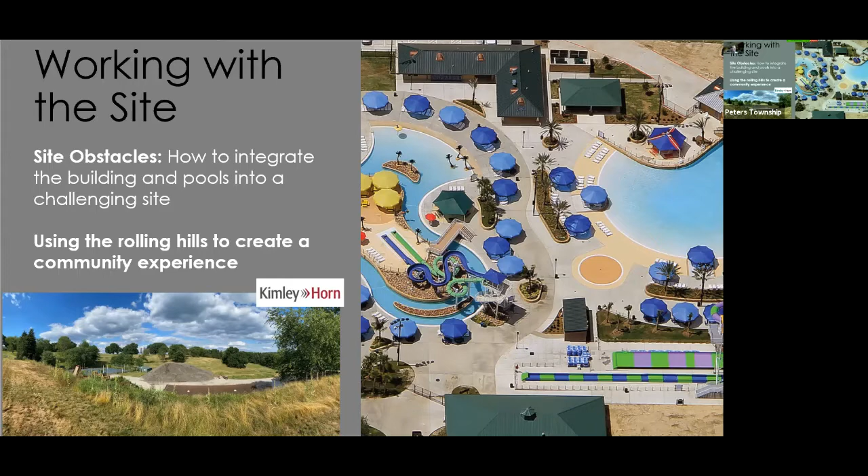In particular, looking at earthwork for this is probably what most people are most familiar with when they see a construction site, right? It's earth moving and machinery, and there's a lot of cost that goes into that.

I think it's super critical as you guys are going through concepts to be doing preliminary grading and earthwork modeling early on in that process, so you make sure that what you're looking at is something you really like, that you can afford, that you're not going to have millions of dollars worth of retaining walls in order to make it attainable.

Also, stormwater management. I noticed there was a large retention pond on one side, and there are several elements of stormwater management just going into your ordinance. Looking at water quality features and volume reduction, that's the kind of thing you're going to want to look at with some of your low impact development standards that you have in your ordinance, and try to spread those things, distribute them around the site, into the landscape and into the facility itself.

So I think those are some concepts we'd like to explore further, and we'll get into that with our site analysis.

So with that, I just want to take a few moments and do the Vanna White piece here, and I'll try to talk loud enough for the mic to pick me up. We took some time to look at what the existing site is. As I mentioned, I've been on it personally a number of times now, and looked at what the master plan showed, and whether there's greater opportunity, or concerns with it, and ways to be better.

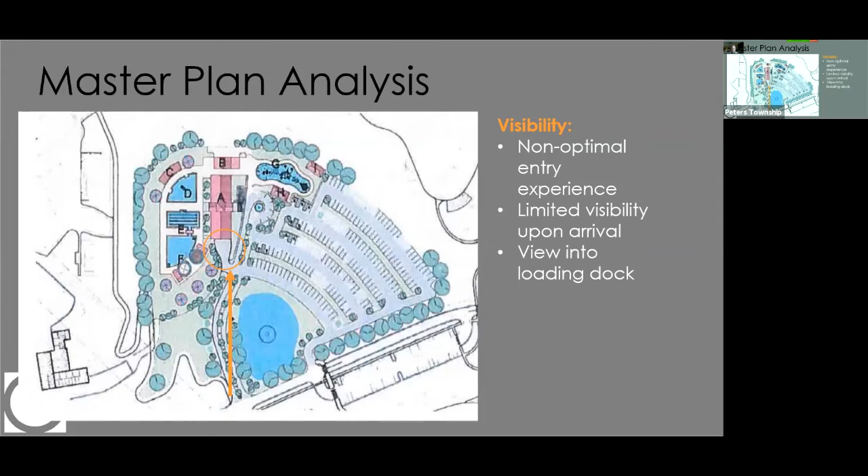The first thing we know, I think the logic, and I wasn't part of the process, was that you have the flat area where the tennis courts are and where some of the parking was, and the overriding logic was to put the pools where the flat area was. So you'll see that's principally what's derived.

I'm going to talk about some concerns with that, but when you look at flow and experience, you look at topography, as Paul mentioned, you look at workability of how people move around, but then you also look at what experience you've created when you're done.

Some things we see that are a little concerning here: with this long drive, you think about going to the pool and dropping somebody off with all the gear, then parking the car. They're going to get out of the right side of that car 99% of the time. So you come up the hill, and by having everything on the left, you immediately create a challenge that's a traffic flow problem.

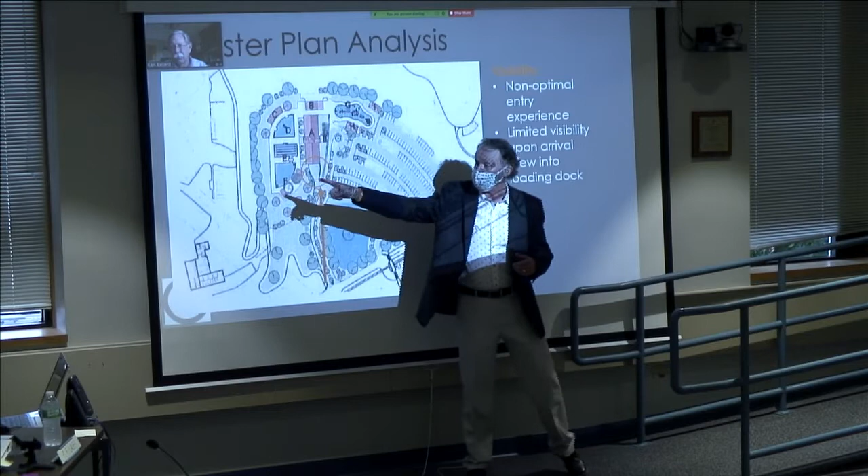We'll talk about that. Because this hill is raised, this area is essentially not visible from anywhere except above the hill. So you pull in, and you see a sea of parking, and you drive uphill, and the principal feature you're able to see is the loading area here.

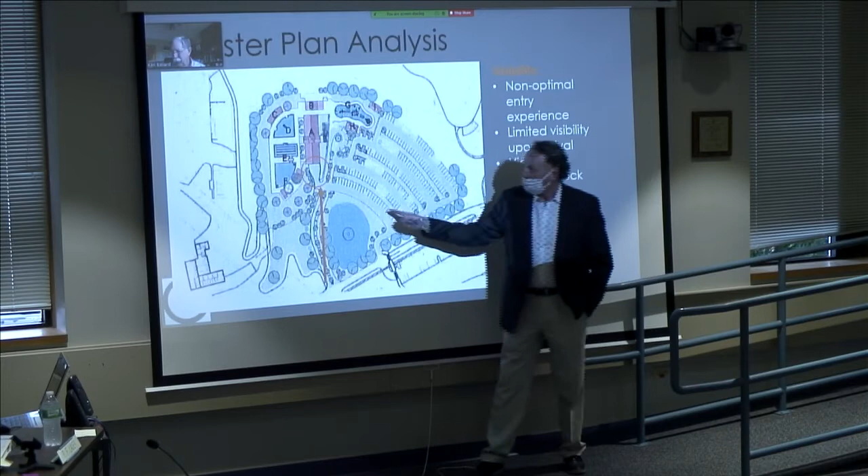Now you have to stay left to go into a turnaround loop. You have to come back down, and then go out into parking, creating a pretty significant overlapping traffic conflict where you have people walking and crossing, and cars that have to go in front of the building a couple of different times. So those are just concerns that we see, and anybody can feel free to hop on.

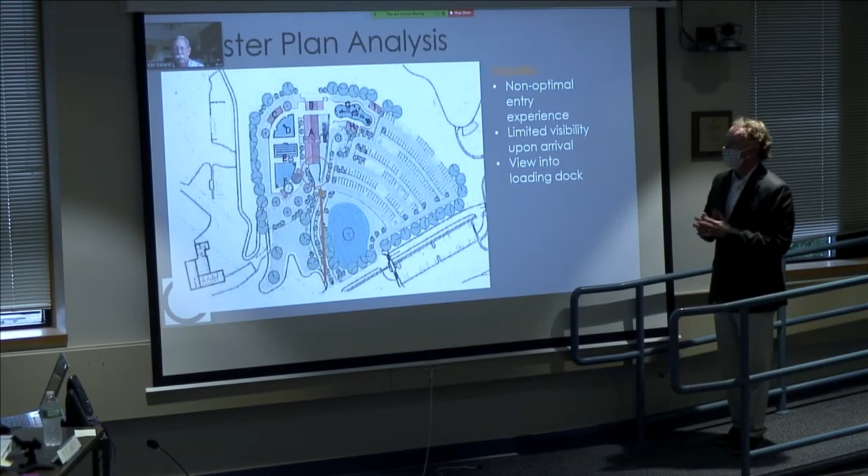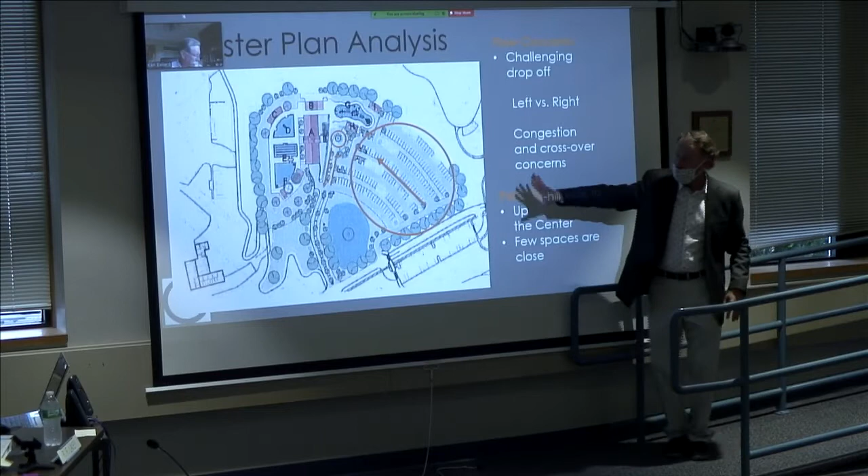So I mentioned this left-right question. Either way, you're going to have to terrace, creating level spots, and do a lot of work to create that parking. And the parking has this fabulous view of the pond, while the pools are essentially a little bit trapped in a pretty small area.

Then people are going to go downhill. Parking's all going to go back down the hill, and now everybody going up is going to have to kind of schlep up to get up to the facility. So those are just some things we look at, along with some of the traffic issues I already mentioned.

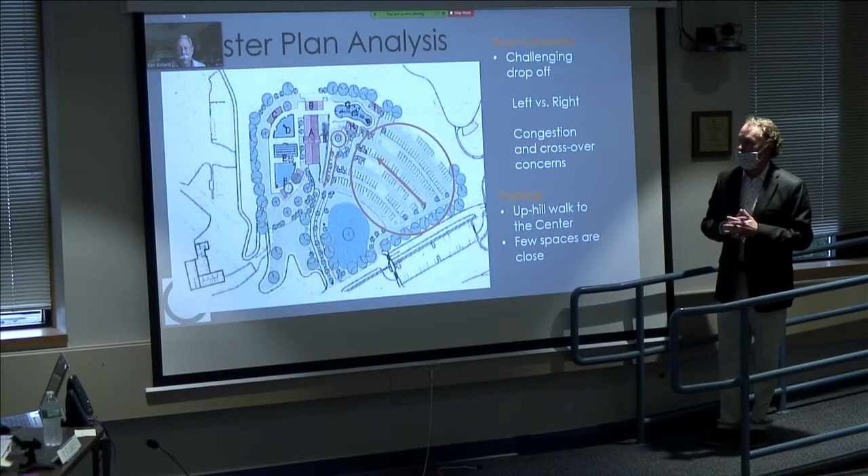The third thing is that if you look at the pool deck in an aquatics facility, by limiting your development area to where it's currently shown, and I'm going to let Carl speak to this, there's not enough area for people outside the water.

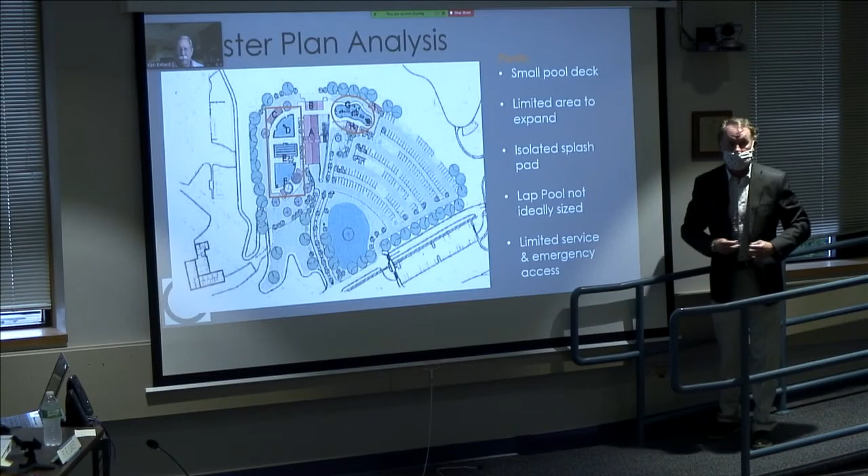With an indoor aquatic center, you're usually looking at about a 1-to-1 deck to pool water surface ratio, and that's honestly just for visually, it's about what we have here. For an outdoor aquatic center, you've got much more of your population sitting in lounge chairs, so you're usually looking at about a 2.5-to-1 ratio.

So you want to look to maybe expand on the deck, and a couple of other physical features, like the splash pad. I know there were some goals potentially to expand the season by a couple months, to get more use out of it, maybe some rentals with a shade pavilion. But having that exterior to the other buildings, it could be integrated potentially a little bit better with the site.

Also, with the lap pool still being a question mark whether or not it's going to be indoors or outdoors right now, having that in the center portion of the site could really hinder some plans for development. So that would be better situated, probably closer to the building and more at one of the extremes of the site outdoors.

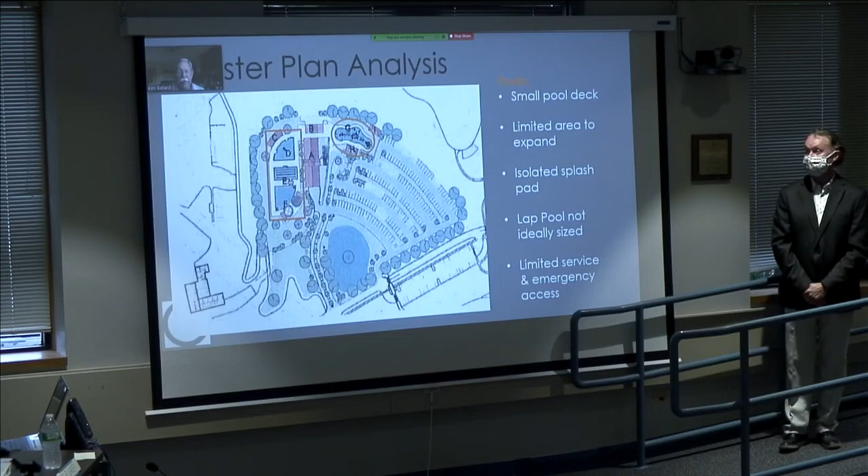I think the main thing, and it's already been touched on, is that we can give you a design that's a little bit more operationally efficient and also builds you capacity with more deck space and more lawn areas that'll help you. It gives certainly a less crowded feel even when you're maybe at capacity. And even the organization, as Carl indicated, of the different bodies of water is probably not ideal for ease of operation, so we'll look at some options that make that more possible.

Again, real concern over if you were going to enclose that 4-lane lap pool, its location within the facility really makes operations that much more difficult during the summer months. So with all of that in mind, we want to develop a concept with you that is for you.

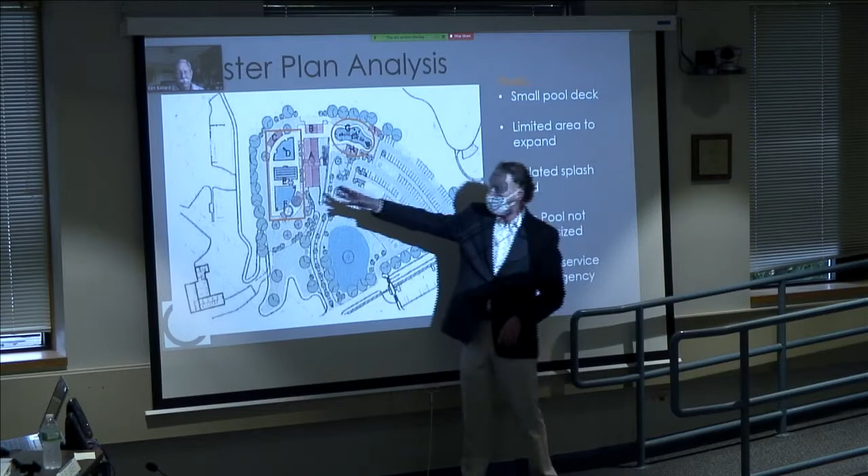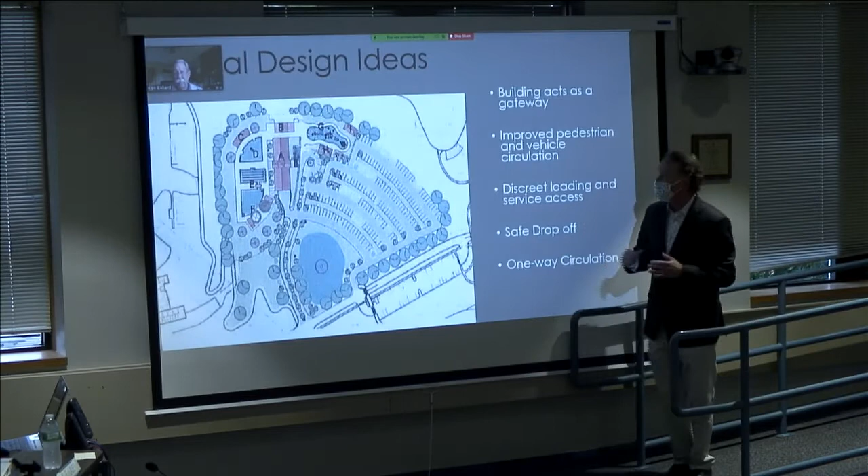We were like, well, okay, is there a concept that could address all these problems? Because not only do we not have enough area really to work with, there's no way to get it in this configuration. You have an enormously steep upgrade hill right here, and another enormously steep upgrade hill there. So it's hemmed in such a way that we thought, what if we looked at it a little bit differently?

You gotta go one more. There we go, there we go.

So what we did is we just said, how can we use that exact same site and solve for every one of those concerns we had? What we really looked at is that if you flip the concept and say, okay, we're going to terrace the area over here to put a really beautiful aquatics facility, and use the flat area you have, plus terrace out of it to get the parking, so it's a zero-sum game.

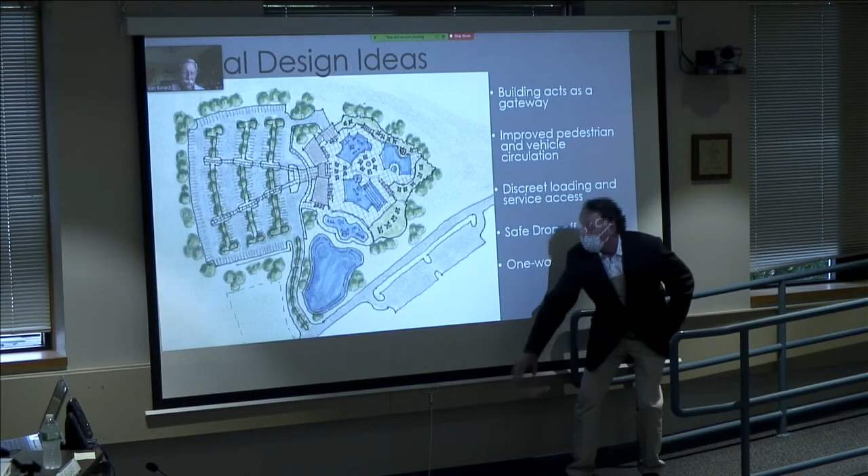I'll just start at the road. You can come in. When you're out here, even on McMurray Road, further down, from your park master plan road, this is visible. That hillside, you'll go by there, and you'll see that this is visible, but that uphill flat area is not visible really anywhere.

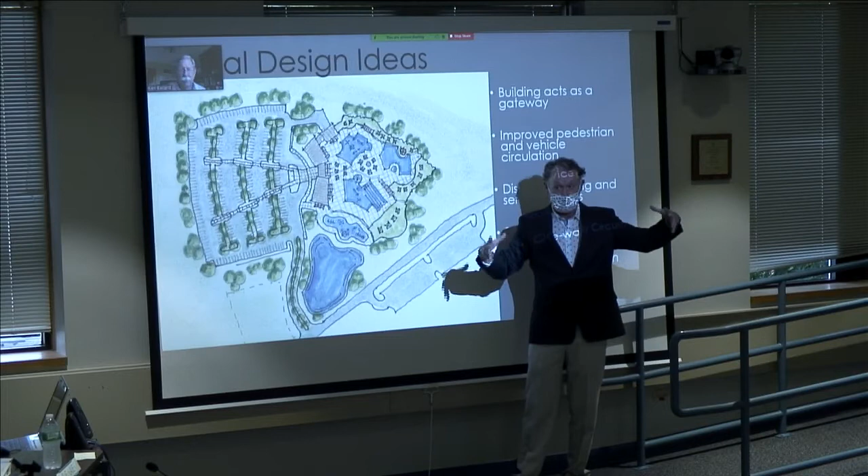But you'll be able to see this beautiful aquatics facility and really have it be an experience. When you would pull in, that's the exact same driveway location that was shown, but with it on the right, you now have a natural drop to the right, just as you would want it without a cul-de-sac.

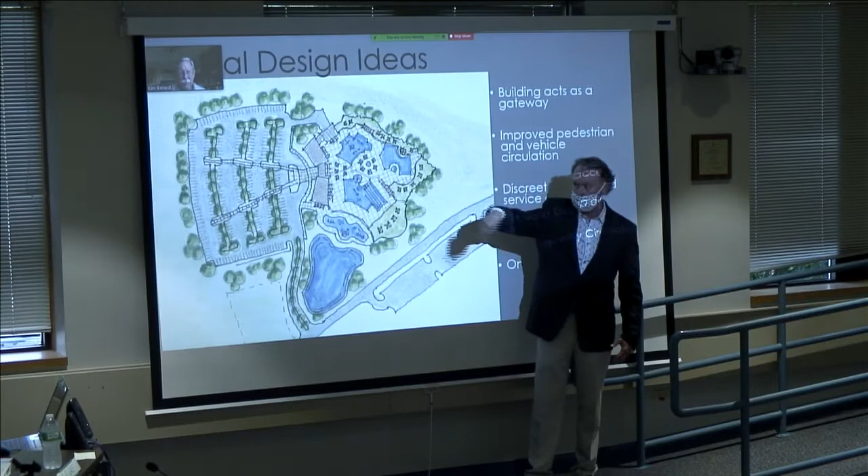You'll be able to continue to move and go out into parking and never cross over that again, so much so that you can do one-way traffic, which would be something to think about in an area where you have lots of little kids and people getting out and not paying attention, maybe people being in a hurry or younger drivers cutting through. So you could do that.

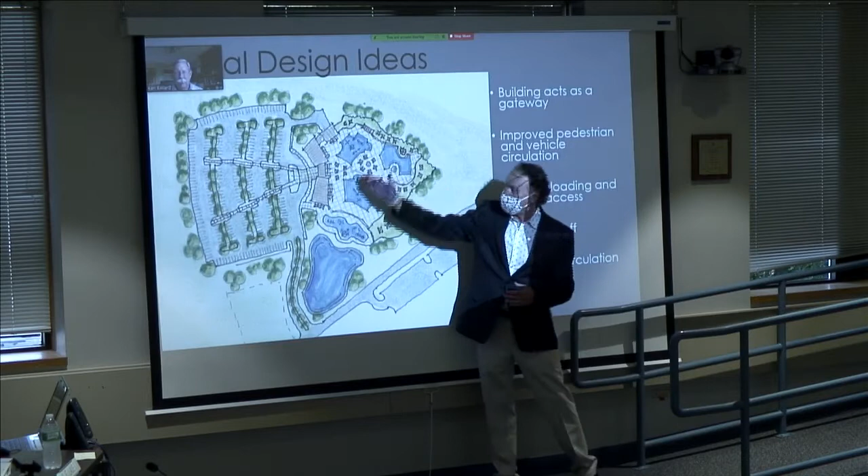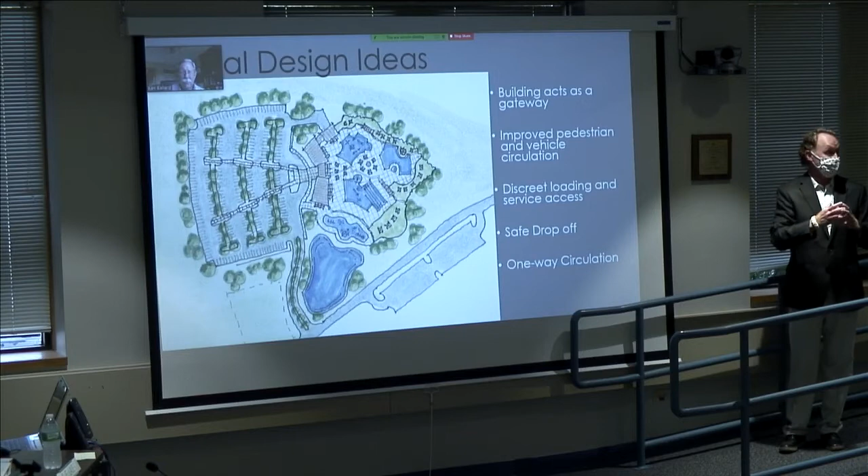Use the building as a gateway to the facility, and then you could start to use the hill to actually step the pool decks down. You look at revenue generating opportunities, or you might want to have somebody take ownership of part of the pool for an event at different hours. You could say this area is those people's, and continue to stay operational. The facility would then maybe overlook the pond and have a better experience looking out than kind of hidden in.

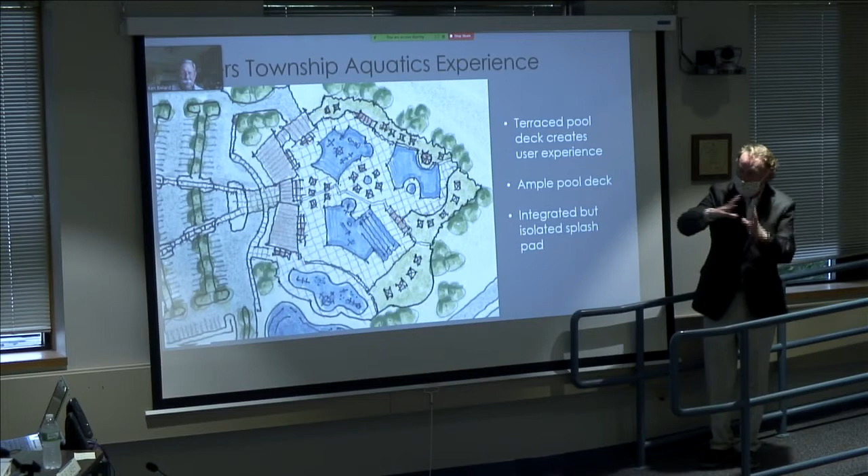You could upsize or downsize it. In a first phase, depending on what the final plan is, it wouldn't have to be as big as this shows, but it's something you could look at. Like I think Upper St. Clair is looking at expanding right now, right, Ken? Yeah, because that area is too small for them. So it gives you the flexibility.

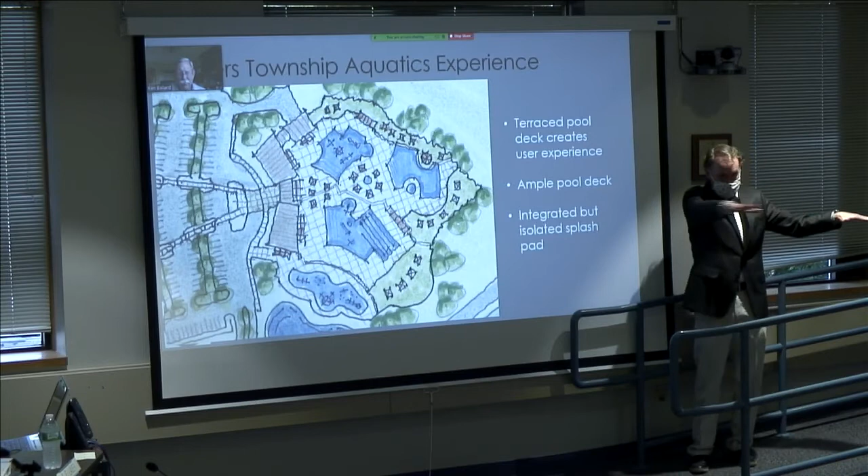It also, if you look at the grades, it would allow all of the parking to be at the same level as the building, so you wouldn't have this uphill, downhill kind of movement.

What am I missing, Matt? I think that's key. One of the better strategies with this, you get that service and loading component pulled up to the north of the site, so it's discrete, it's screened, but there's a lot better access and the elements in this plan are spread out a little better. So you can get your service trucks in there and do what you need to do day-to-day, but it's not right up in everybody's face.

It's well contained. So you'll see we zoomed in here, but this gives you area for grass areas for people to be in, not just on the pool deck, ample pool deck, lots of different experiences and not jammed up. If you operated a splash pad in a location like this during the summer, it could feel fully integrated.

I'm sorry I'm blocking your view. Is that — not a problem. I should have stood there and blocked all of you.

But in the winter, with a gate here, and this would be a step down anyway — or not winter, but after Labor Day and before Memorial Day — that could be open, and you don't have to do anything else to secure the upper pool. But during the key part of the year, it's part of the experience, and people can go from the splash pad up to the pools and have that kind of experience.

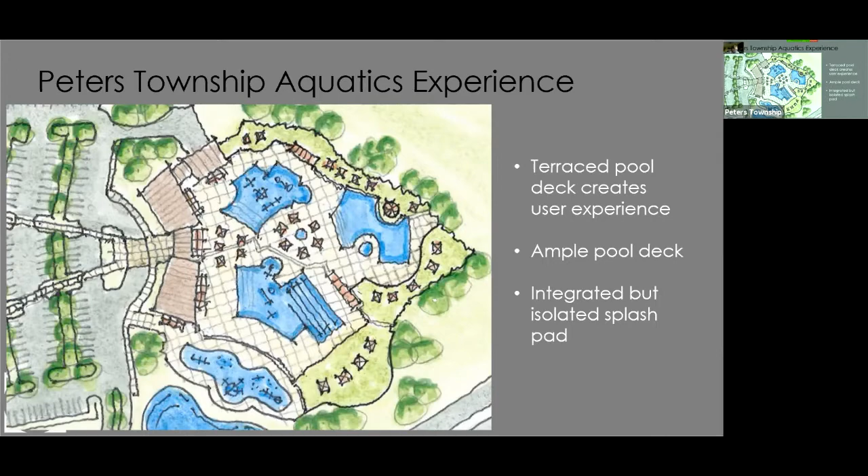So just wanted to share with you a different way of thinking about the whole thing. So we take a moment to turn toward the indoor piece. Okay, so your study talks about an indoor component.

Yep. And the concern that the experts — Ken and Carl will tell you — is if you do a standalone indoor aquatics facility out at the park site, financially it will never have a cost recovery that you'd probably be interested in. And if you guys want to elaborate on that for a moment.

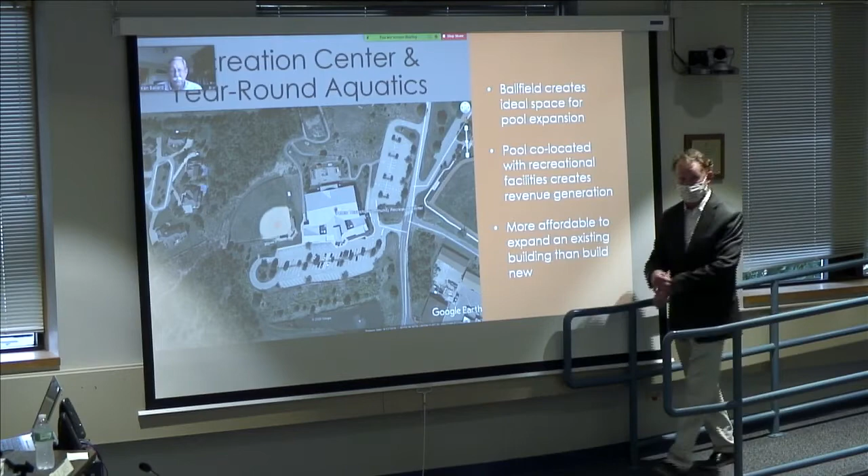Yeah, Ken, I can let you take it, but for a standalone lap pool like this, if you're only talking about 4 lanes, the ability to draw revenue from local swim groups is going to be limited. You can get some lap rentals, potentially some parties, but without any leisure components it's going to be difficult. Then you're looking at therapy and exercise groups, potentially aqua yoga and things like that. But you're probably looking at a model that can recover 40% or so of the operating costs.

Yeah, certainly under 50%. And even though we know they're looking at options of either 4 lanes or 6 lanes, even at 6 lanes it's not going to do significantly any better. As was said, standalone indoor aquatic facilities just flat out don't perform very well financially. There's just not enough draw there.

So that really led us to thinking about other options. I'll let Martin go to that and start to attach it to other amenities where we know the rate of cost recovery will go up.

I had the opportunity to come by and visit and learn that with the new high school, it's going to have an indoor competition pool. So even the need for a lap pool kind of falls off in the community to a large part. So probably what you really want is a more community-driven indoor amenity pool that has some of the same features you had outside — zero depth entry, you can have classes in it, some deeper water, warmer water, and so on.

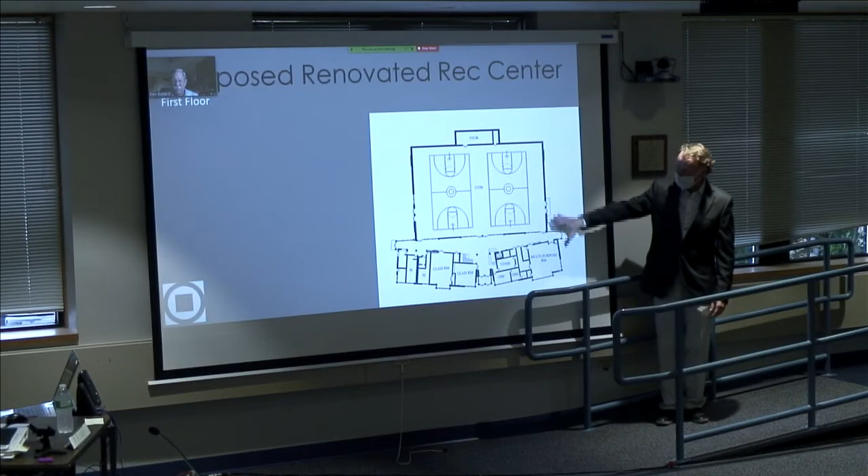So how that could possibly look, if you did that - you're all familiar I'm sure with your rec facility, it's a pretty simple diagram. You come in, main circulation, gymnasiums here. You could sort of plug and play an aquatics facility onto the left side of that. It's as perfect as you could make it, if you wanted to consider it.

I walked up the hill and looked down. All of your infrastructure, utilities, and air conditioning and stuff is behind the building, out of the way. So you're really free and clear.

Paul shared with me that - I don't know if any of you were involved in the original design - but that ball field was put there to consider expanding for a pool. Well, there you go. I didn't realize that, but I knew it was for expansion.

So it can be very simple to come in. You might have a second entry, or you might just stick with one entry - that's more of an operational and security issue. You can go in dry side, go through the locker rooms, right out onto a pool deck.

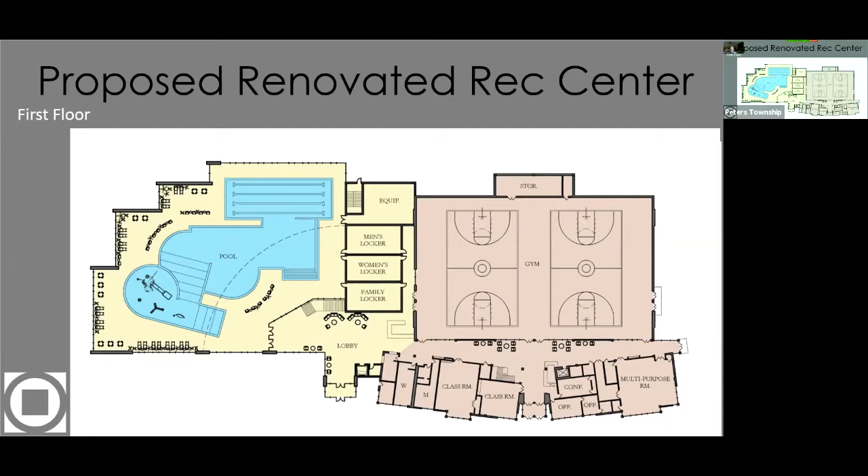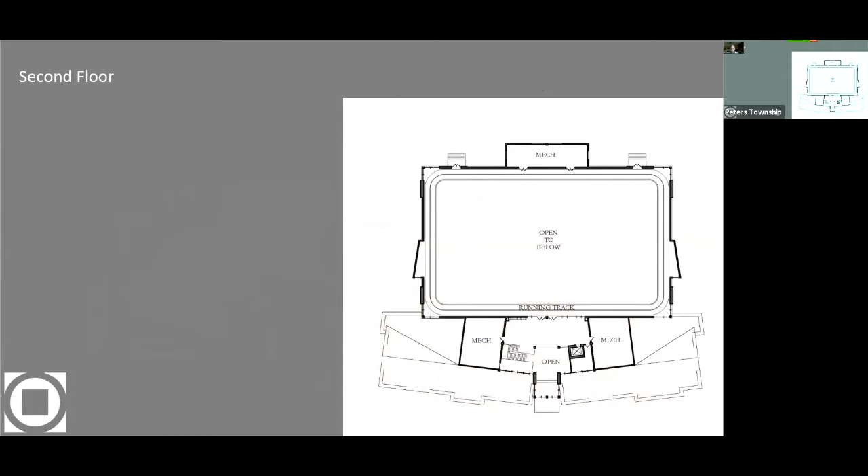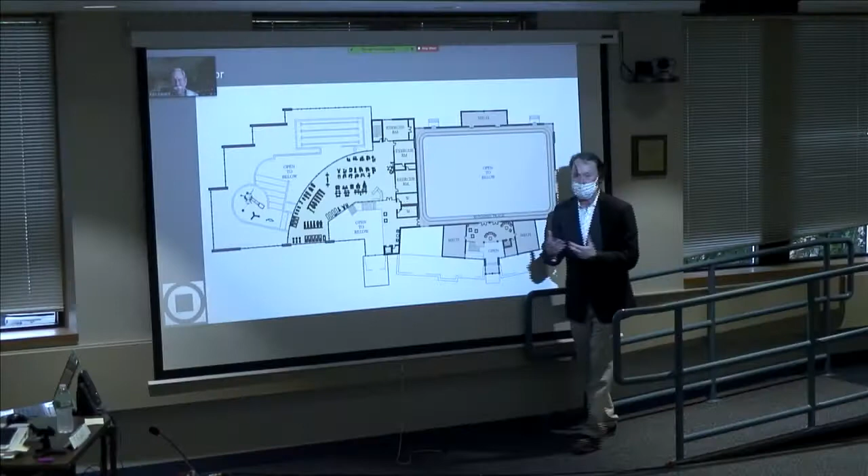One of the things that you'd probably want to consider adding, from a cost recovery standpoint, that you don't have - and Ken will speak to this - is fitness facilities, because that drives membership. It doesn't compete with your tax-paying gyms, and we've talked about that in probably 35 communities. You could have a fitness center that overlooks the pool, which would generate revenue to help support the facility. So I'll let others communicate on that.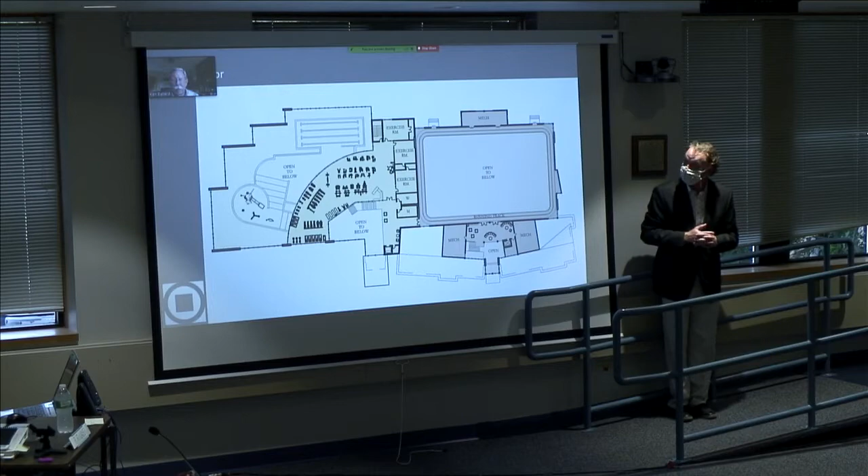Ken, you want to talk about how fitness is a key piece? That's the greatest producer of revenue per square foot of any amenity in an indoor facility. So we know that drives utilization of facilities and overall revenue.

And again, even in Upper St. Clair, when we did that, the private sector has thrived even after that facility came in. We found not only in your area, but across the country, public facilities become, in a sense, the entry point for people into fitness. The private sector often comes in behind public facilities, and when people look to go more specialized, then they take that on. So we simply have not seen any real competition issues with the public sector getting into this.

And whether it's in Western Pennsylvania or the West Coast, that's remained true, especially over the last 5 to 10 years. So it is an amenity - probably the most utilized amenity, even more so than aquatics in terms of people coming to a facility. It would be an interesting piece, obviously a little different than what you've been talking about up to this point, but probably deserves at least a little consideration.

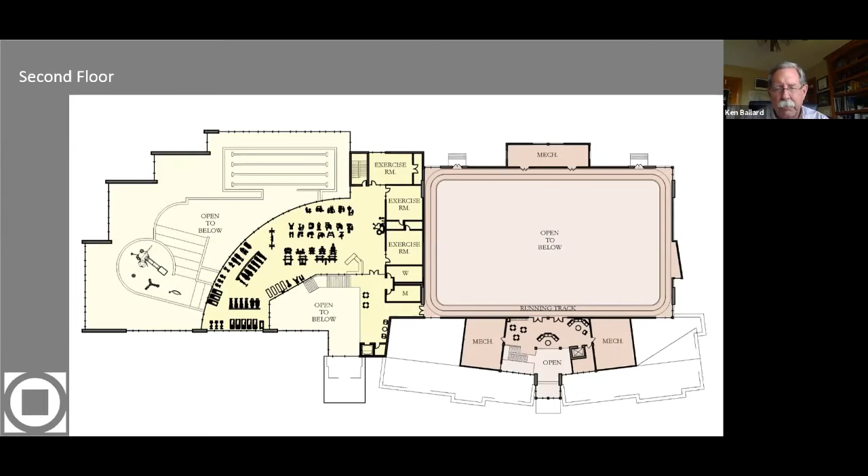So with all that in mind, Matt, we'll go back to the site plan, because that was really the key piece we're here to talk about, even though this is all important. We would love to have any questions, comments, or thoughts that you can share with us.

Well, I have a question. Given the current situation with the pandemic, I realize that nobody has a crystal ball. How do you think that's going to affect your projections? You're talking about assessing the operating expenses, looking at potentially doing a break even. What is your comfort level on your projections? Ken, I'll let you lead that one.

Well, it's certainly a big issue, and I think the feeling within the industry is that certainly with the current situation, that won't be a permanent situation, so we'll be able to get more capacity, whether it's related to aquatics or any other use of facilities or programs coming back. How quickly that comes back is another issue.

I do think there will be some changes in how we operate facilities. We're starting to take those into consideration in our planning efforts for new facilities or for renovations as part of that. And there will also be, I think, some expectations from the public about concerns of overcrowding, so it's going to push down some of our numbers somewhat.

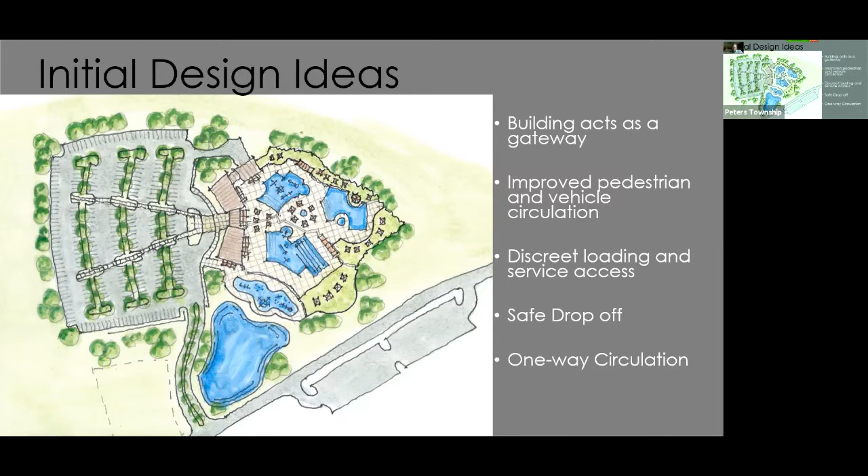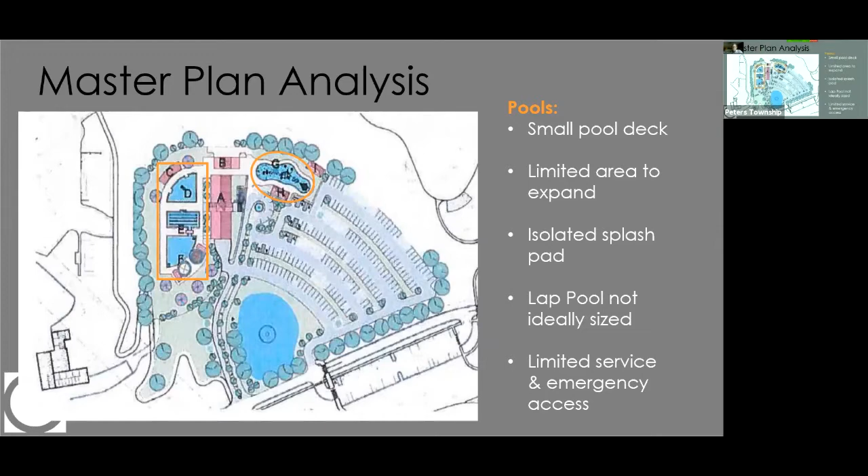Oh, if you go back to the master plan, there was a wet pond shown on the master plan. That's stormwater. You see that blue? Same thing. We just duplicated the pond that was shown, assuming that was part of the stormwater. I thought you were going to put a pond in, and I wanted to know why we're wasting all that space. Oh, good. No, that was just duplicating, making a slightly more organic shape than what they showed. Same idea, though.

Thank you. Back to your proposal, for your cost proposal. Given the situation, if in fact we made a determination that we weren't ready to proceed, do you have a window of time at which this proposal will be good for, if in fact it's delayed, or we would make a decision to not proceed immediately?

No, I think I speak for all of us saying that, if it was 3 years, maybe we'd say that everybody's getting paid more hopefully by then, but if it's certainly at least a year, wouldn't be a problem at all. And most likely if it was 15 months out and you said we want to go, we want to honor that. We really hope to become, with all of our clients, particularly municipalities in Pennsylvania, really a trusted partner, almost like your solicitor. We're here to help you make great decisions, and that's our first and foremost thing, is give you great information to make great decisions, and then help you execute in a great way whatever that decision is.

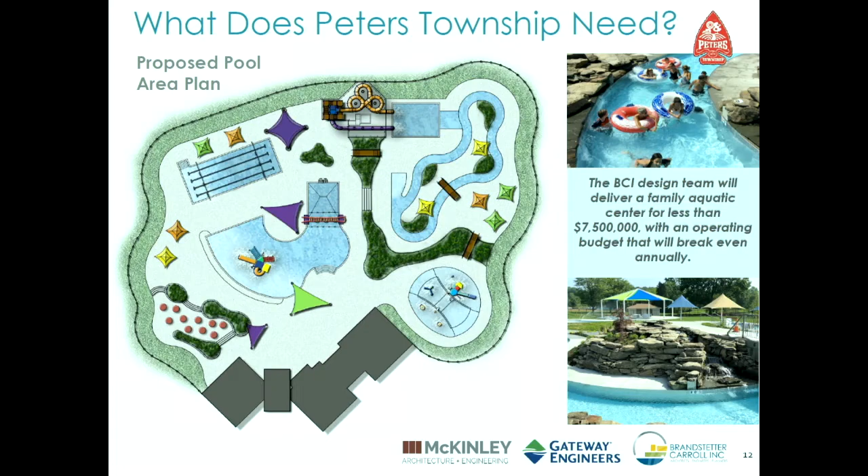There's a lot of things you can do with these lazy rivers. These things can be real fun. You can activate them with all kinds of features if you want, or you can leave them just as a nice passive activity. As Nancy was mentioning, they're great for exercise, and the other good thing about having this many bodies of water is you have lots of different opportunities for swim lessons and all the kinds of activities that go on in the mornings before you open the facility.

And this is just a larger view of it, showing one possible layout for the terrace parking coming down, stormwater control at the bottom of the hill there, and drop off in front of the building.

Also, these are a few representations of bathhouses we've done in different areas. We try to bring in the architecture and make it fit the community as we go. If you notice, these examples all are significantly different because they represent the contextual nature of that community. So everything we design fits the community, not what we have in our head.

The other thing I'll point out on this layout is that basically from the lap pool down to the pool house is where your basic level space is now, so those tennis courts are right up here.

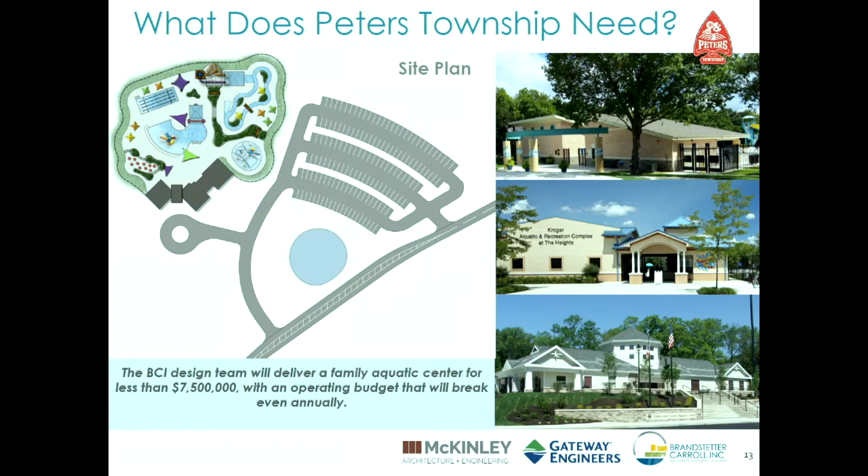To get you in context with what you had planned, the previous plan was similar to this. The parking mirrors almost exactly where the parking is in the plan that was in your master plan, with the tiered grading that would come down here. And then we're anticipating that, again, within the pool fence area, we'll have a couple different levels of grade there.

A couple other things we wanted to share with you. We had some of this in our submission initially, and Paul had some great questions on it, so we've updated this a little bit. We have two charts here.

One is attendance forecast, and one is cost control, which is construction cost. The list is identical from one to the other, the same projects in the same order. We're showing these from all different kinds of years, but it states where it was located, the population of that community, what our forecast attendance was and what the actual attendance was in that particular year.

And what the deviation is, that's for the forecast. Then we also look at their operating costs and revenue to see how they do on their break-even. We have all of these examples — most of them are break-even, some have a large surplus, some a small surplus, some a small deficit. It kind of depends on the year that you track. But we've got about 12 projects that we've looked at in that way.

We have those same projects. We've looked at construction costs, comparing our construction estimate to the actual construction contract and the percent of change orders. Larry, I think the average change order percentage is typically about 4% on a project in the industry. We've got one in here that's 4%, but most of them are under 4%.

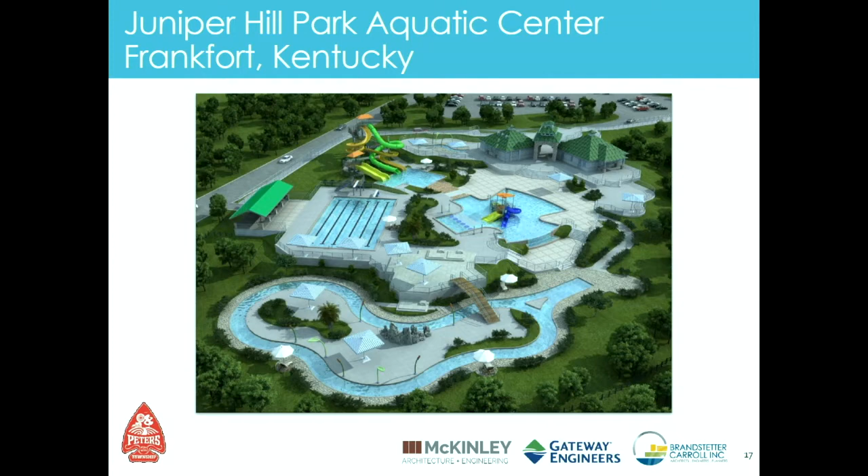The other thing I'll mention is in the layout we did for Peters Township, Peters Hill Park, that slide is intentionally over the grade change. So the tower is actually shorter and the slide kind of goes down the grade change, taking advantage of the grade change with the slide.

Huber Heights had one of the more fascinating projects I've ever seen. We did a 10-acre park as part of this. There was a total expenditure of about $10 to $12 million. That project was about $5 million, just on the list.

They built the entire project with tax increment financing, so there was no increased taxes and no effect on the city's budget. Then they turned it over to the YMCA to operate. The YMCA operates it and makes their profit out of operations. So the city has virtually zero money in a 10-acre, $10 million park.

I like to think when you look at projects and the impact of the project on the budget, you want to minimize the impact and maximize the benefit, and maximize the number of people that come through the gate.

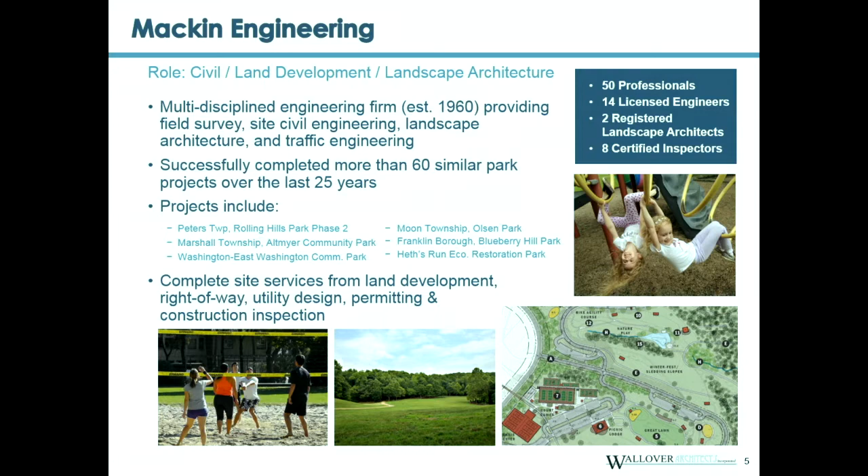Mackin's been here since 1960 in Pittsburgh. We have 50 professionals, 14 licensed engineers, 2 registered landscape architects. We do everything from field survey to site civil, traffic engineering, landscape architecture, etc., all the way through to permitting and inspection services. So it's really beginning to end for site type land development and work. We've done many projects with Wallover Associates. We've worked on Bellwood Antis, Washington, East Washington, Rolling Hills. Our history goes back a little bit. There's also some projects listed up there in other areas that we've done in Moon, Franklin Park, City of Pittsburgh, etc. But we're going to be here for many years to come, and we hope you get the great impression that our work counts. We rely on repeat clients, and we're here to continue to do a great job for you.

I'm going to turn it over to Mark, and he's going to talk about Hayes.

Yes, hello. My name is Mark Dwayne with the Hayes Design Group. We're an architectural firm located in Robinson Township, and I myself am a resident of Peters Township. Our firm's expertise is mostly in municipal and governmental buildings as well as K-12. Those are our predominant clients, but we also do other higher educational and commercial type projects. We're bringing capacity to the table as far as getting documents done, and also we'll be doing a lot of the construction observation. Being local, we'll be able to be on site as often as needed.

What we listed up there as far as pool experience, why it's important is that one of the options may depend on whether a pool is inside the building. We've done numerous school projects that actually had pools in them. It's an integral part of the design to incorporate - once a pool is inside the building, you have to take into consideration the mechanical systems that go into that space and also the finishes, and we're good at coordinating all of that effort.

We pride ourselves in doing affordable, functional space that meets clients' needs, and always keep the budget in mind. That's a very high priority with us, to monitor the budget throughout the project, and we like to do that without sacrificing any quality in design.

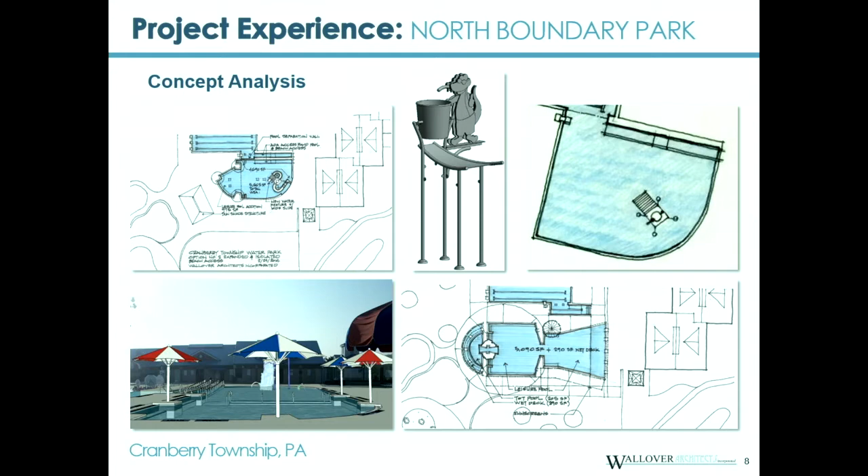Our designs really take on a variety of technique. We look at developing different ideas, we test those ideas with the client, we test them with the recreation departments and the operators. And we generally go through a series of freehand sketches and design ideas that we present during the initial process. Those ideas then are translated into CAD documentation, and then those ideas become reality.

And this is some pictures of the completed project. The tumble bucket feature has just been an absolute smash hit for the kids in that particular location. But all of these images here basically relate to the interconnected nature of both the pools and their water playground features, which are both major components of your desired activities.

This is a project that's south of here. It's down in Graysville, Pennsylvania, south of Washington. This is Ryerson Station State Park. We were the aquatic architects for this project.

You may have seen in the news a few years ago where the dam breast cracked and they had to basically drain the lake down there. This project was a direct result of the lawsuit that ensued, and we were then directed to develop a brand new aquatic facility for the park. And we started with the basic concept design drawings you see in the lower left.

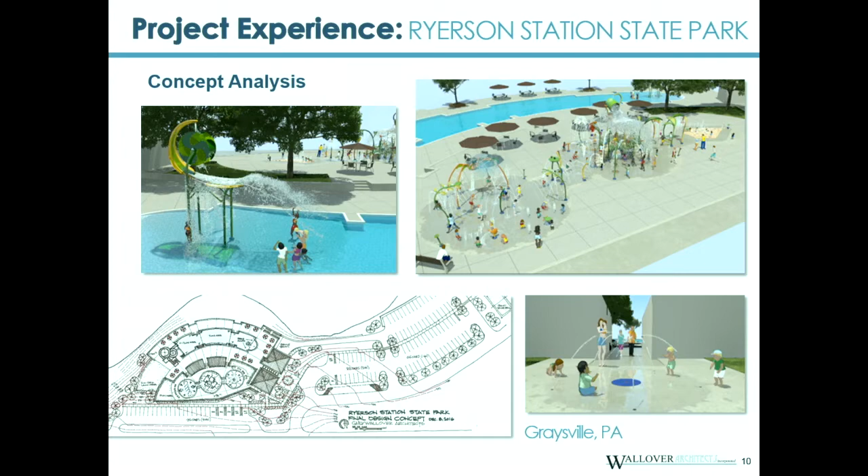They were then generated up into CAD Revit models that were illustrated and rendered, and those were the documents we were able to produce to help the Department of Conservation and Natural Resources in Harrisburg make their decisions as to how they move forward with the project.

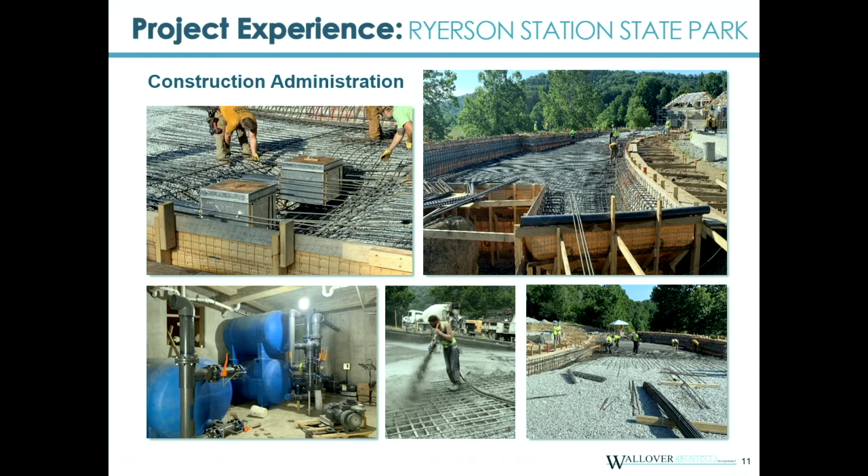The slide on the lower left is the filter plant. It's a high-rate sand filter system utilizing glass media, very similar to the system used at the high school. So when we think about the kind of components and elements for this facility, we want to make sure they are compatible with the work done at the high school. There are commonalities, so there may be an opportunity for the township and the school district to share expenses and staffing for maintaining the water in both facilities.

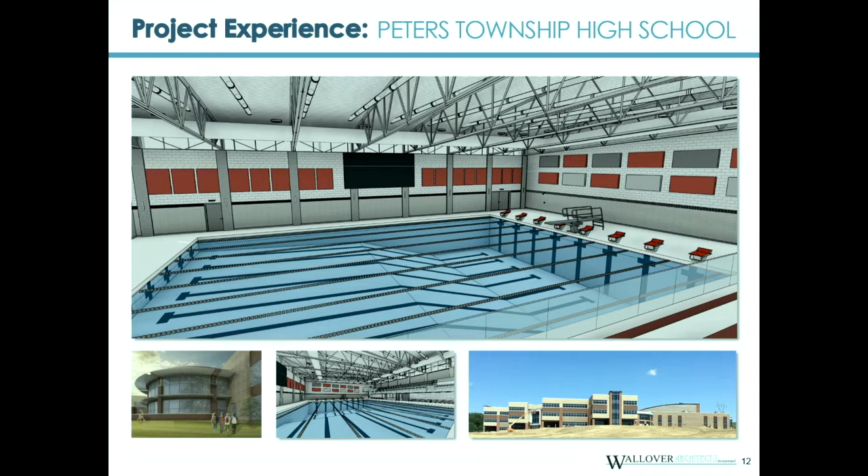This is the Peters Township High School pool, an 8-lane Murtha pool. These are the renderings that Mark's office generated. Mark, you want to jump in? No, there's not much to say here, Ted, other than that's the experience of that project, just an 8-lane competition pool. Most people here are familiar with the project, but those are the renderings the firm did and the progress pictures of the construction on site.

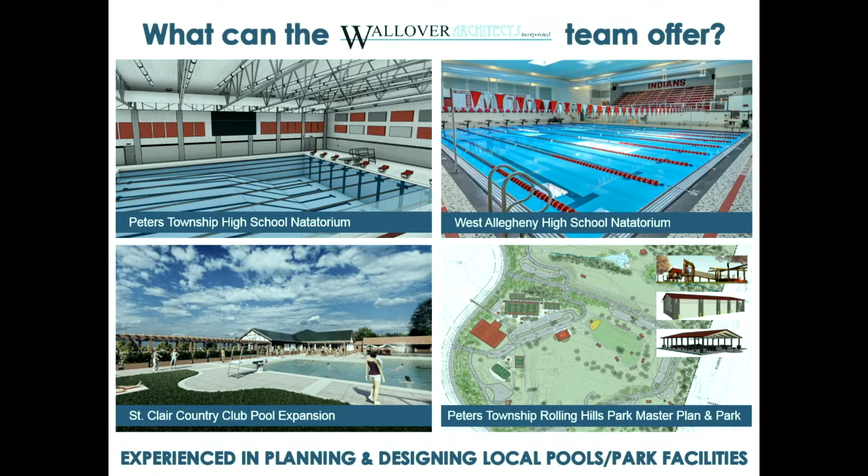We really are a unique firm. We have a strong national and international background. Susan developed a complete renovation program for the operation of the water sports palace in Dnipropetrovsk, Ukraine. It was a facility with far too many employees, operated in more of a Soviet style. She brought United States techniques and the way we manage our pools to their facility. She may be able to talk more about this, but it was a very important project for our firm in terms of international exposure.

We took them from a budget that was deeply in the red to being happily in the black within a few months. They've made some changes, and it's completely different from the way they used to operate, but it's really been to their benefit. The facility is actually their Olympic facility there in Dnipropetrovsk.

The other important thing is that although our practice is based in Lancaster, we work across Pennsylvania, so we have a very strong working knowledge of all the players in the swimming pool industry, both from a manufacturing standpoint and from the actual contractors in the field. With Mark's experience, Bob's experience, and our experience, we have strong local knowledge of the market and who best to bid these projects.

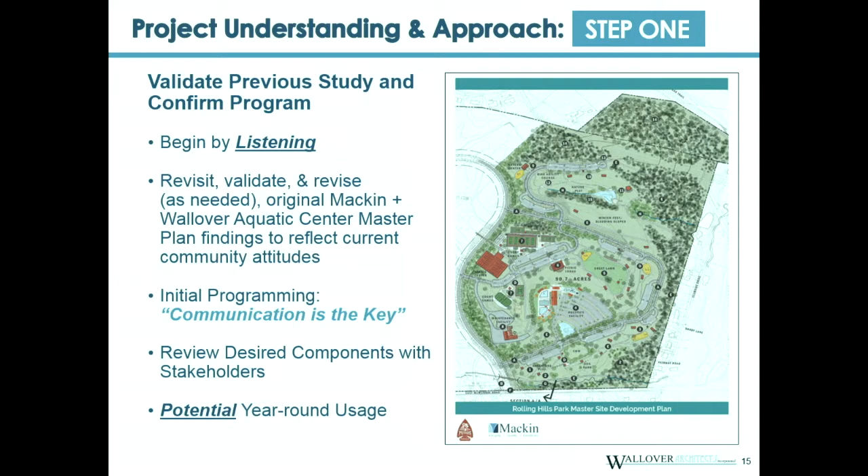I think one of the things we really pride ourselves on is that we are good communicators. I think all of us really enjoy working together with the staff and making sure we bring those ideas into the design process.

One of the things we'll do with you is determine the types of facilities the complex should host. Again, it's going to be based on the information we generated initially with the feasibility study, but also with new data that comes to the table. Bob, Mark, and I, Sue, we really want to make sure we have a full understanding of the components you think would be most beneficial to you.

Susan will be able to tell you which of these kinds of activities can generate the most revenue, and those will be the things we try to determine for you, so you have a full understanding of what those components are, what kind of programming can happen for them, and what kind of staffing requirements might need to be there in order to properly operate them. It's pulling all that information together in one location so that when the township makes that decision, they have data in front of them that's real and relevant.

From that standpoint, we're going to be looking at all the various components that impact the site, ADA compliance, and how that impacts the design of the pools. The fully accessible bathhouse, filter rooms, multi-purpose areas — those are all things that were in that initial study that we will come back to and make sure are still valid and appropriate for the facility you hope to build.

I'm going to talk a little bit about step 2, which is understanding the site. As you know, in the past we've looked at the entire 90 acres originally. This was a southern-facing slope, and that's why the Aquatic Center was situated in this natural bowl area. To get the most length out of something like this, seasonally, the southern-facing slope is the best location versus what we have on the opposite side of the ridge — that'll be the Winterfest area, which keeps the snow most of the year.

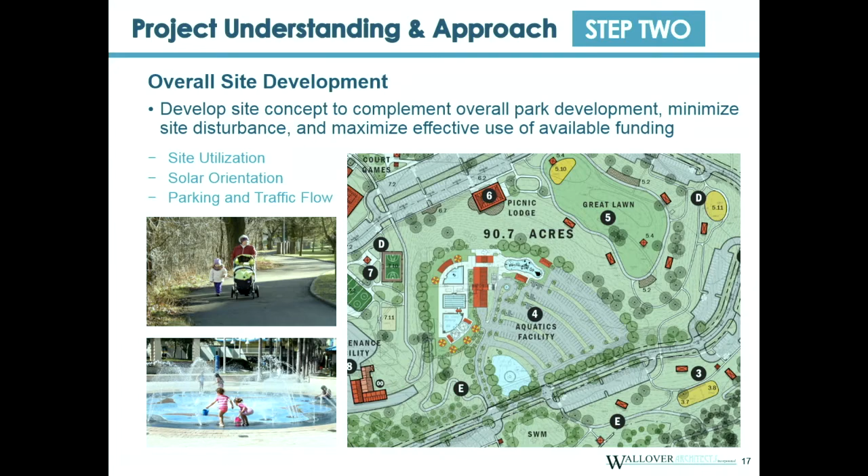Traffic calming, parking, access, dual entrances into this facility, connections for bikeways, trails, and sidewalks—we've already given plenty of detailed thought to this, both as an engineering firm with landscape architects, but also with the architects themselves, and had a lot of interconnected conversation to help figure things out.

So we're excited to continue this, and I'm going to turn it back over to Ted.

Once that process is completed, we'll again work with you to determine what particular features will be involved with the project, and make sure that all the amenities you're looking to achieve will be documented and pulled into the project. Again, with step 3, one of the big things we've hit this year that really none of us anticipated was COVID-19.

When talking to the CDC and looking at some of the things going on, the CDC has really deemed that swimming pools are some of the safest places we can be. Water quality and the type of sanitation and secondary sanitation can go a long way toward controlling virus. COVID-19 is not capable of being sustained in swimming pool water, but it does have the ability to be contained in buildings—so those are all things we look at.

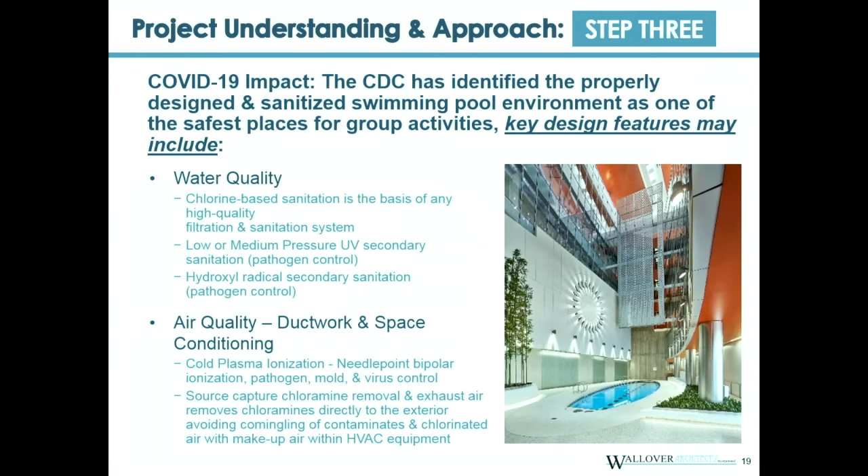In terms of chlorine-based sanitation, low pressure or medium pressure UV and hydroxyl radical are all treatments we use in our pools to make sure water quality is spectacular and clean. That's the most important thing we can do for our kids and users of these facilities—to make sure the water is filtered properly, sanitized properly, and put online.

When we talk about air quality in the building, if we're looking at a year-round structure, we're going to be looking at chloramine capture and the ability to treat the air in the ductwork with cold plasma ionization, to kill and reduce the effectiveness of bacteria, molds, and virus in the ductwork system and in the air column of the building.

Cold plasma ionization has been around for a long time, but there's never really been a reason for people to spend the additional dollars it takes to put it into buildings. Now we have that reason, and from this point forward, all of our projects are going to be utilizing cold plasma ionization for air column treatment.

Source capture of chloramine really only impacts an indoor pool—it's not something we have to worry about outdoors. But if we do go the route of an indoor pool, we'll make sure the air handling systems are designed so those chloramines are removed and taken out of the space, so anybody using the pools won't be subject to high levels of chlorine.

So I'll talk a little bit about the fourth step after the site's development has been worked over, and the aquatic facility has been laid out. One of the last design features, step 4, would be taking a look at the two different design options for the building. Oops, disappeared. You can look at your book. It's coming, it's coming. Okay, that's all right. Well, I'll continue.

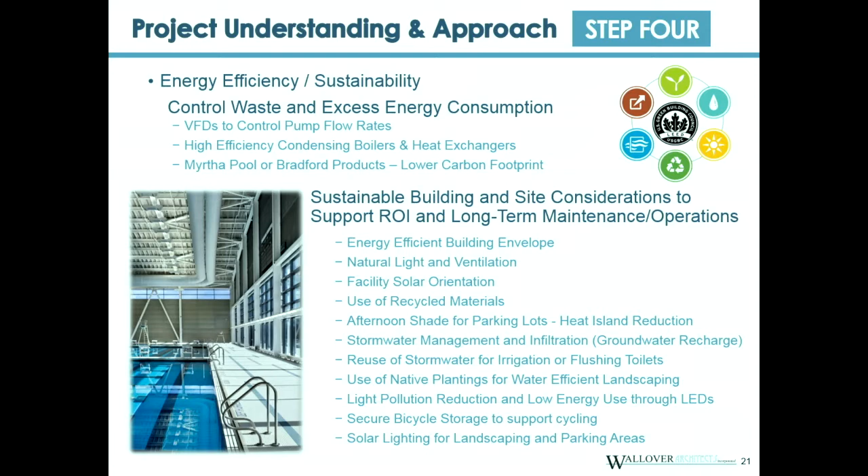LED fixtures are very popular. I don't really need to go there because I think that's almost a standard now in architectural design. That reduces the consumption of electricity. Bicycle storage, we would look at that to encourage more people to maybe ride their bikes to this facility versus driving cars, to help the environment. And then also we would be looking at solar lighting for landscaping as well.

Oh, that's me too. I got to flip the page.

All right, so step 5. Once we have the site, the aquatic facility, the building, and we've talked about the design and gotten through all that, now we've got to put together a construction estimate. Actually, our team prefers to call it a project budget, and we like to present to our clients an all-inclusive project budget. I think it's best that you see all the money that needs to be in.

It's all in, because when you hear people talk construction estimates, really what they're talking about are the hard costs. So in our project budgets we divide it into two categories: hard costs and soft costs. The hard costs are the construction costs with the site development, and there may be design contingencies. That's so the clients have the ability to make adjustments during the design and absorb some of that design contingency. Once we get into construction, there's a construction contingency that will help pay for any change orders. So we appropriately recommend a percentage amount to hold for contingencies. That's hard costs — that's all the what you're getting for your money.

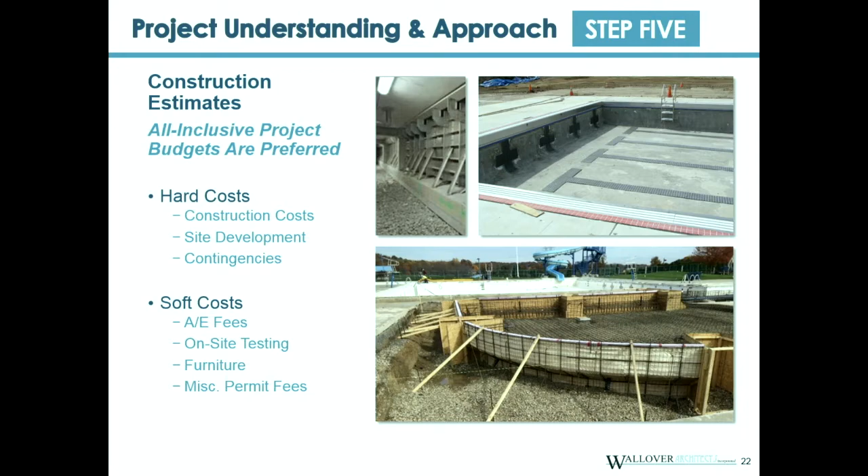Now there are soft costs, right? So you have to realize that there's architectural and engineering fees, there's on-site testing, there's furniture like the pool furniture, there's equipment in the building, and there's miscellaneous permit fees. We try to identify, and we would work with the administrative staff as well if there's any other cost involved, but we really like to bring to the table everything in the project budget so you know all the costs that would need to be spent.

I have step 6, and that's the business plan and understanding everything that goes into it. This comes about after the pools, building, whatever is designed, so that the budget can then be prepared. The first step in any budget I do is talking with the staff about goals and objectives, so that I fully understand, and they fully understand, how we go about getting to the budget and what kind of things are going to take place.

We'll do a comparison in the budget with the summer-only and year-round operational revenues so that you have a good understanding of where those costs will be. Organizational structure will be, needless to say, for the staffing. It'll include, depending on the facilities, seasonal, part-time, and possibly full-time if it's year-round.

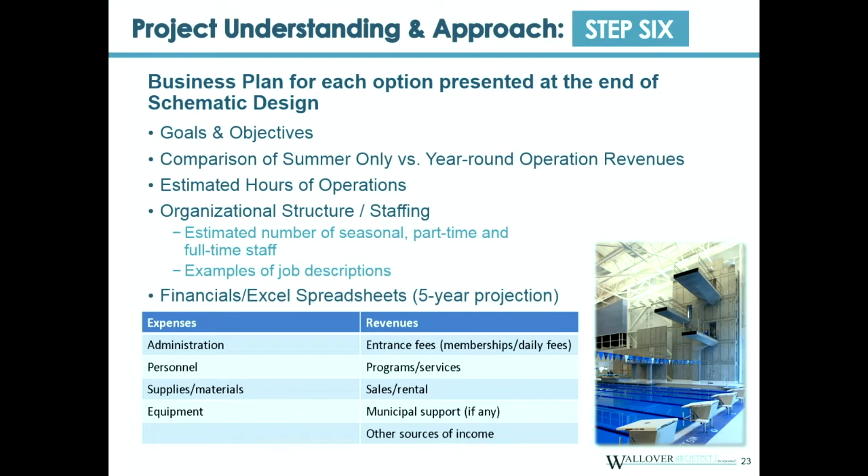The spreadsheets are your normal spreadsheets. I'm not going to go into all the detail on that. It will be the expenses, revenues. But what makes mine a little different is that I really go into detail on what supports that data. I don't just use what similar pools of similar size are doing — I nail it down to your area, what's going on here.

The construction costs that are included at the end come from the architects. There'll also be a discussion about the financial options that may be possibilities for the township to use. I'll give suggestions for special events, not so much how to operate them, but what are some of the things other communities are doing that have been very successful and intriguing for that community.

We'll also do a SWOT analysis so you understand, during the operation, what are the possible opportunities, weaknesses, and threats, and we'll help deal with those ahead of time with some suggestions so nobody's caught off guard. We'll use the studies that have been done and anything else we can use to get our numbers correct for you.

Lastly, I wanted to mention how this all comes together. How do we communicate with council and the community? The process is iterative. We're going to start off meeting with the administrators, kicking off the program and talking about what we should do.

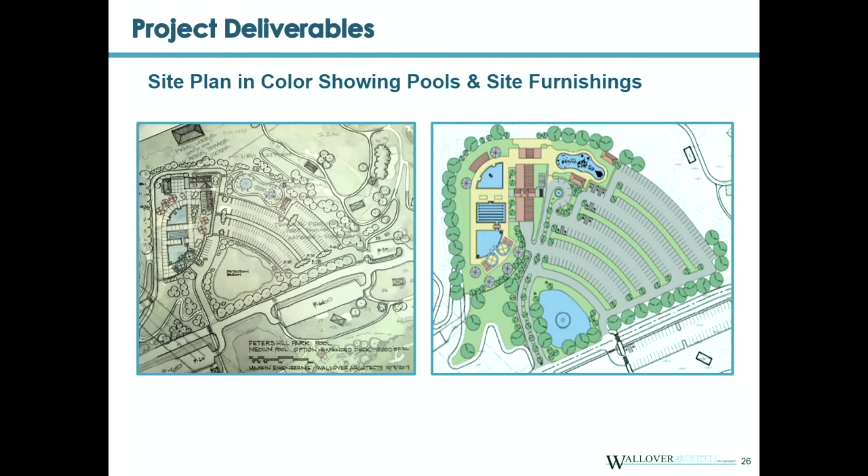It's obviously Peters Hill Park - this was one of the early initial drawings we developed in the early stages of the project. You can see how it developed from a freehand drawing into a CAD document. That's really the process we use: everything goes from the hand to the computer, and then ultimately it's rendered for presentation to the community. We do everything in Revit these days.

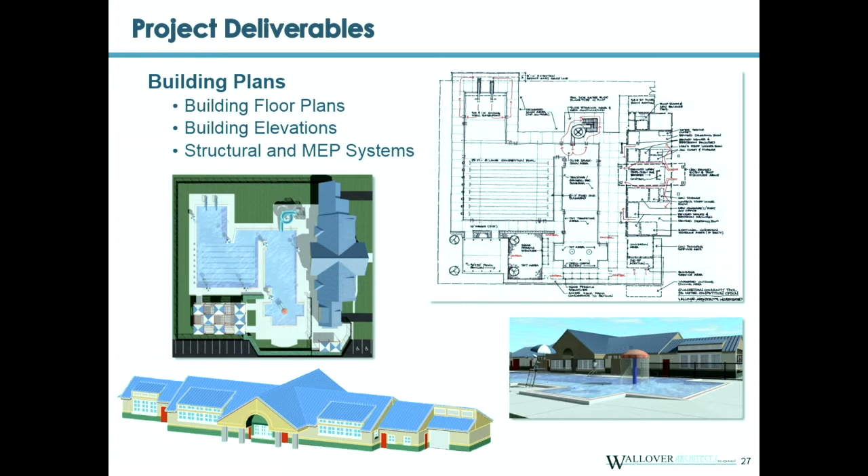We're now working in Revit, which is a three-dimensional AutoCAD software. It basically allows us to build models of everything we're building within the computer. We can take a hand sketch, generate a plan, generate building sections, and create accurate and extremely thorough documentation for the project. The advantage is you can be there virtually with a walkthrough or fly-through, and get to see the spatial arrangements.

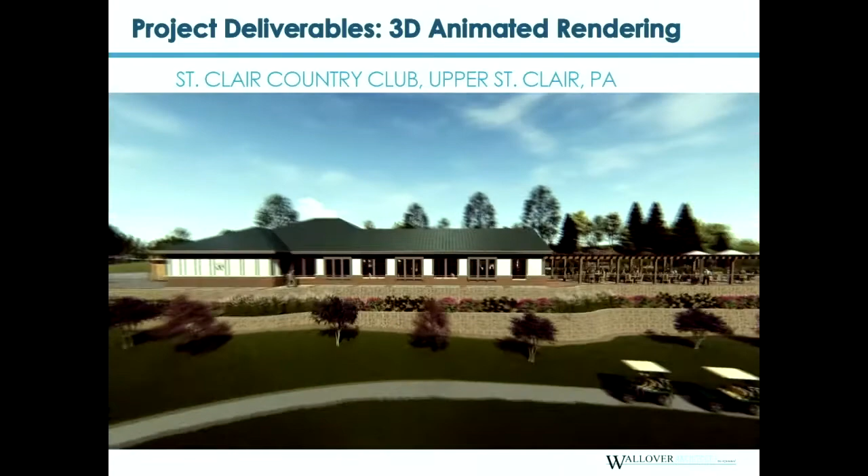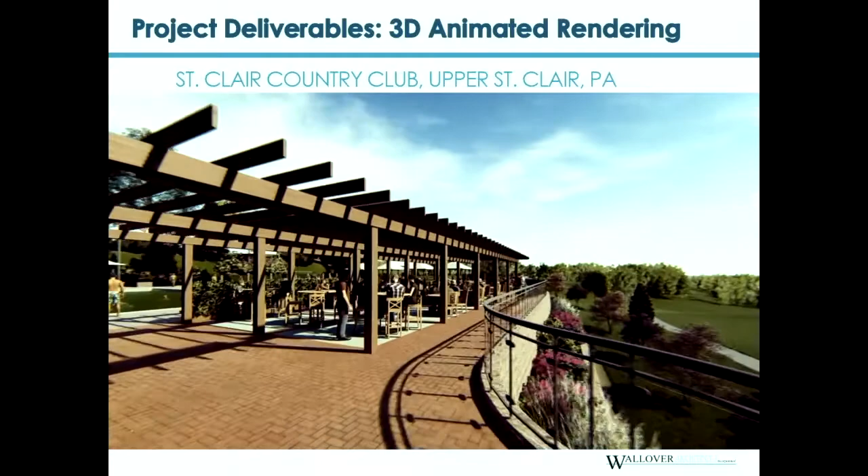Speaking of which, here it is - this was a fly-through we did for St. Clair Country Club. They wanted to do an addition onto their pool house, which is actually an indoor grill and an outdoor grill that the golfers and the members at the pool could use together at the same time. This is something we've included in our process to deliver to you.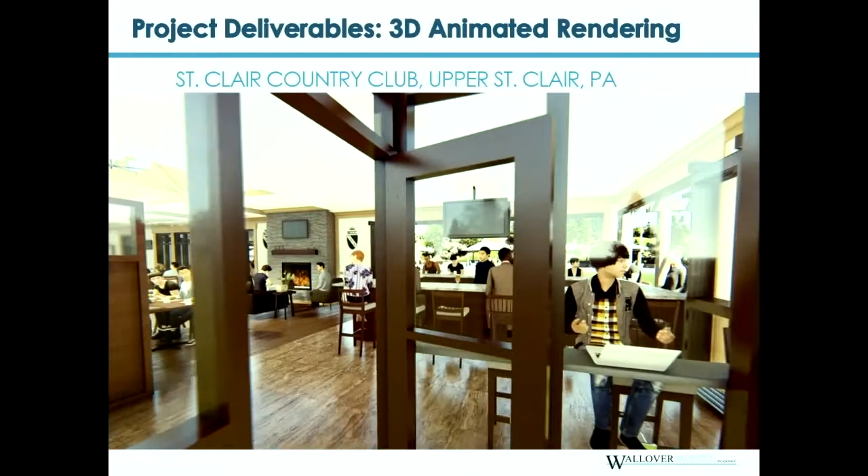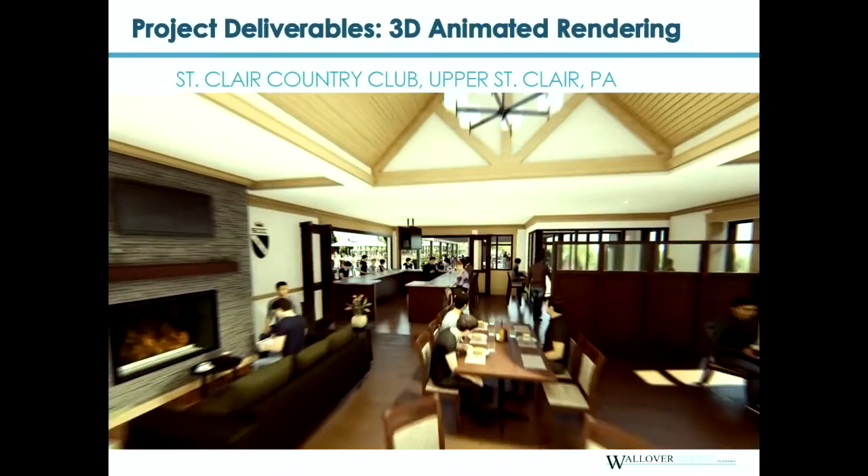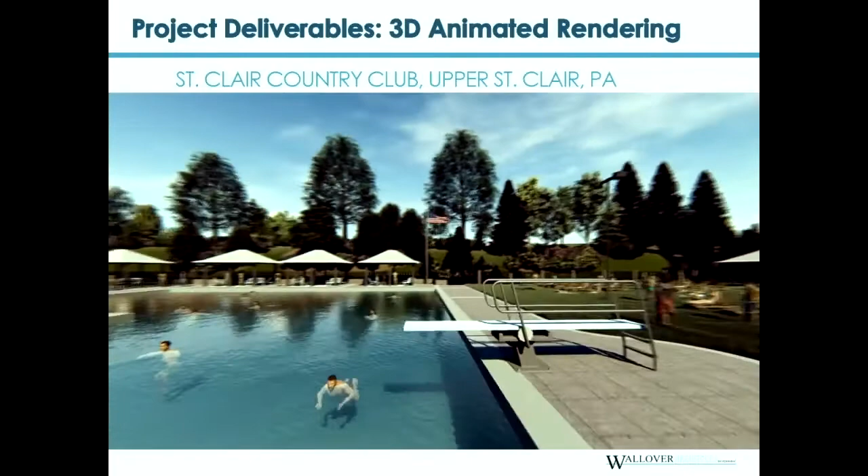We think this really helps not only council, but you could also share it with the public. When they took this to the board at St. Clair Country Club, everyone got really excited about the project because now they had a virtual idea of what this space was going to feel like, rather than just something two-dimensional on drawings. Even nice renderings are good, but when you fly through the spaces, you actually feel like you're there.

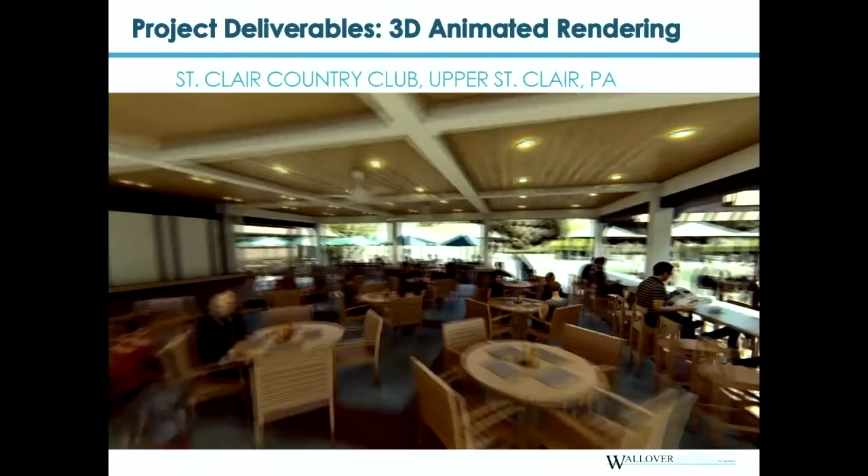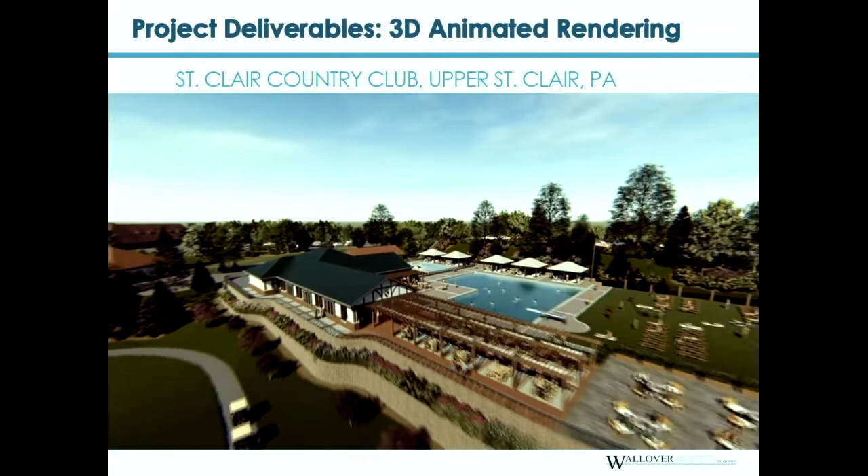We just wanted to show you a quick clip - it's not too much longer than this, but you can see how the animation works, with fans going and people moving. You can pick how you walk through a facility and what you're looking at. That's something we present at the final presentation.

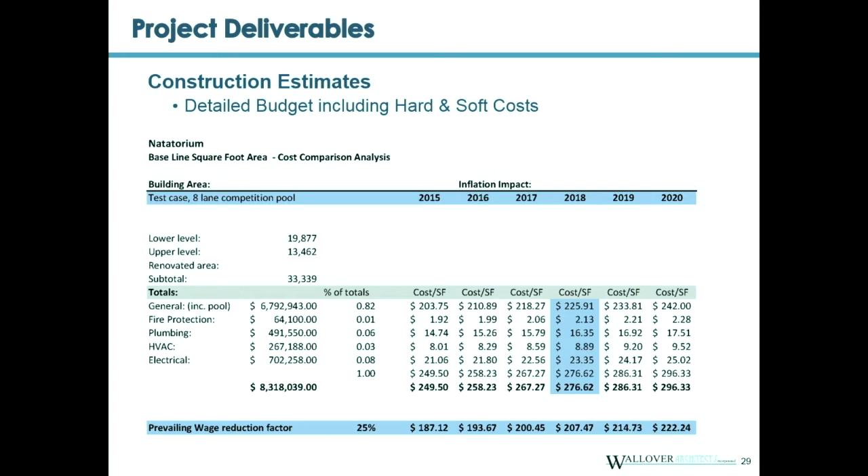Also part of the presentation would be the construction estimates or the project budget. These are just spreadsheets, but what we wanted to show you here is that we also take into consideration escalation. So if you didn't decide to do it by summer 2022, and it was instead 2023 or 2024, we actually project out columns to help you understand how expenses would grow over that time. This helps make decisions on whether to move forward sooner or wait a little bit.

And then we'll also have a project schedule. We're going to keep you informed of the project schedule all the way from beginning to end. Usually we start these with the end in mind. We start with council, like what is your goal? If your goal was to open a pool and say Memorial Day of 2022...

This is an example of the detail I can get into to support the budget. This is part of a workbook in Excel, and this actually becomes live. So if you change something in one place, it'll go all the way to the main budget and change that for you. But you will understand exactly where each one of those numbers came from, and that it's not an estimate or a guess from somebody else's budget from another pool.